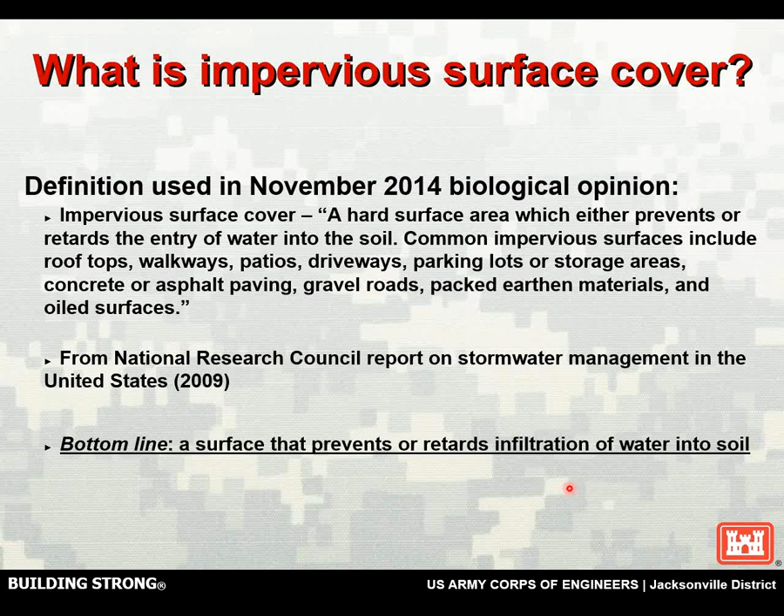Some examples of how we'll see this impervious surface cover: any type of paving, also precast concrete or slabs, abutments that are made of concrete. Some bank stabilization projects, if it's a concrete lined ditch, for instance, or it's riprap that's been grouted, anything that will prevent water from flowing between the rock or pieces of concrete, that would be impervious. And of course, anything with a concrete pad or paving, house pads, driveways, sidewalks, anything like that will be included.

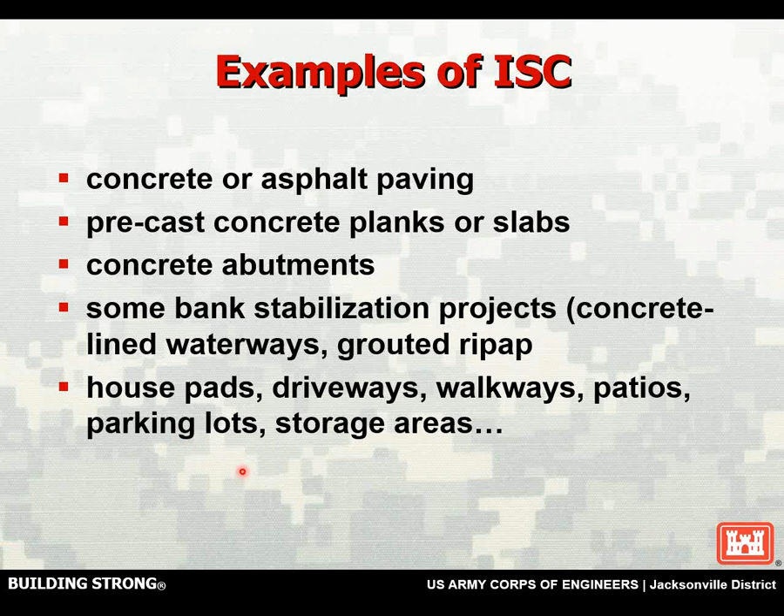So it's just as important to understand what is not impervious surface cover. So anything temporary, even if it is impervious at the time it's there, as long as it's not going to be a permanent structure or fill, we're not going to track that as impervious surface cover. Fill for slopes, that's going to be important to DOT and other linear projects. Lawns, parks, anything that can be filled and still maintain vegetation.

Mechanized land clearing, types of techniques, whether it's porous pavers or mats that are specifically designed to allow water infiltration. Again, water can flow through, it's not going to be impervious. Riprap. If a boat ramp is constructed, for instance, with loose rock or metal grate, again, water is able to move through. Bioengineering techniques, whether it's log vanes or willow planting, obviously that will still allow the water to percolate through, so we would not count that. So the bottom line is it's any project feature specifically designed to allow the infiltration of water.

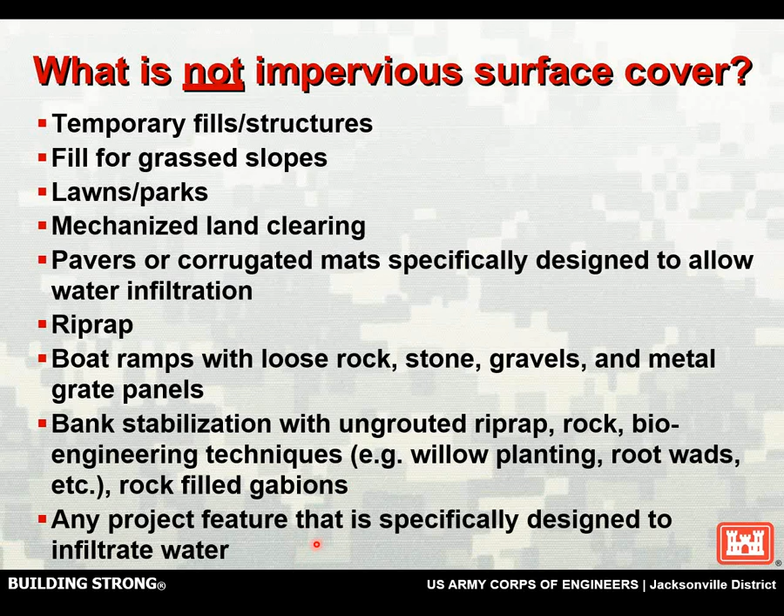But what doesn't it apply to? Well, structures that are just regulated by the Corps under the Rivers and Harbors Act, Section 10 waters, things like piers, piles, buoys, marinas, floating docks are not going to create impervious surface cover. Same with dredging. Important here, fills that are below the mean high water line or the ordinary high water line, whether it's in tidal or non-tidal waters, would not create new impervious surface cover. Same with excavation activities, no new ISC from that. Again, any temporary fills, as long as they're temporary and will be removed, we won't count those.

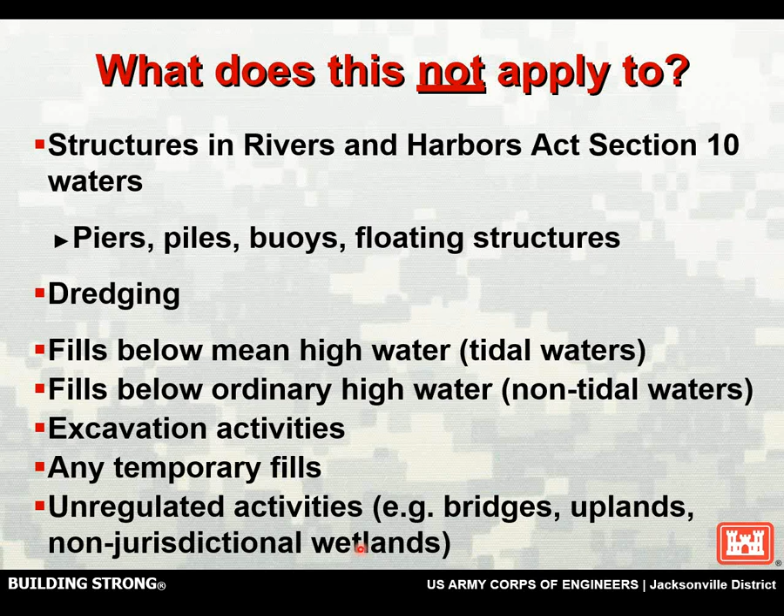Unregulated activities, an important one here in the examples, bridges, for instance, the Corps does not regulate those, that's the Coast Guard, so that would not create any new additional impervious surface cover. Work in uplands or non-jurisdictional wetlands, again, would not be considered ISC that we need to track.

So what we're going to track and enter in the Corps data entry system, ORM, are additions or removal of impervious surface cover that result from regulated activities in waters and wetlands. So it's not going to be all impervious surface cover that may result from a project that we permit. We're only going to track the additions of ISC that are within those listed 10-digit HUCs, basically the ones that NMFS has provided to us as the ones they're concerned with. So it has to be in those locations, it has to be associated with permanent losses, nothing temporary, and it has to be directly a result of our regulated activities.

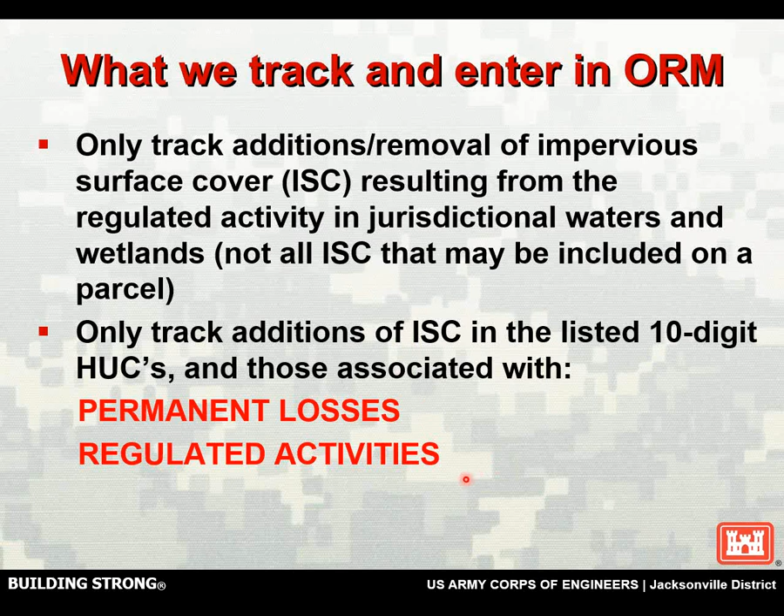So a little example here, if you look at this entire photograph as a Corps authorized project. Massive project. We've got a wetland stream that runs across this part of the photo. We've got some impervious surface cover as a result of the Corps permit. Got a road crossing here with some ISC, same as here and here. So these 3 road crossings all involve impervious surface cover.

You've got a lot of impervious surface cover here for this parking lot, building, parking lot, road, but all that area is in uplands. So even though it is part of this overall project, it's not regulated by us because it's in uplands. We would not track that. We'd only track the impervious surface cover in these 3 wetland crossings here.

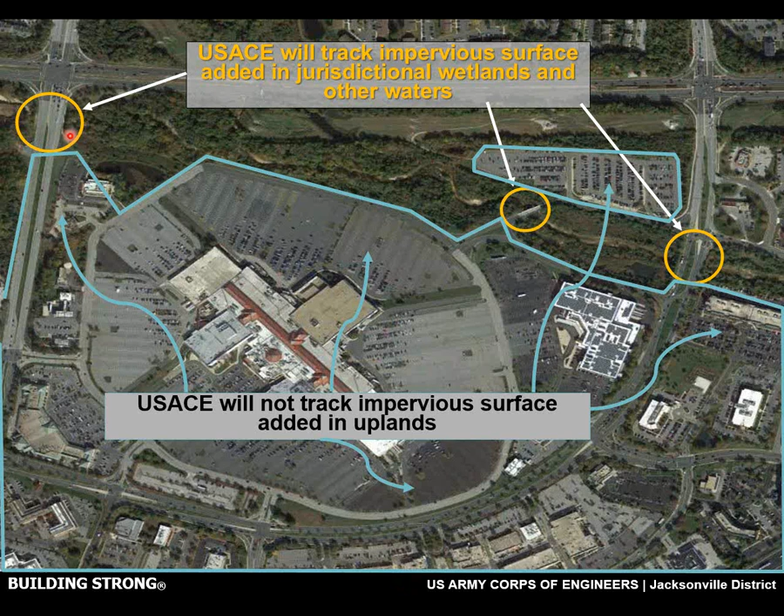So the 1% threshold I mentioned earlier. What NOAA Fisheries did was they looked at the most recent data they had, which was from 2011, the USGS land cover information, and they determined what the baseline acreage of impervious surface cover was in each one of these 10-digit HUCs that they're using. And then they calculated 1% of that baseline acreage. So if it was 100 acres of impervious surface cover within that watershed, that 1% would be 1 acre.

So as the Corps project managers enter additions and removals of impervious surface cover, we'll put it in ORM, and ORM will calculate as we go what the net additions add up to and whether we're getting close to that 1% threshold. And that's where NMFS feels there may be an additional effect to species that they have under their purview.

So as we put it into our data entry system, we'll see if we're getting close within a watershed to this important 1% threshold. We'll see the amounts as we enter them. We'll also see a percent over the baseline if we've already exceeded that baseline. We can see that when we input this data, when we issue permits, and we'll also be running reports so we can see that information as we go.

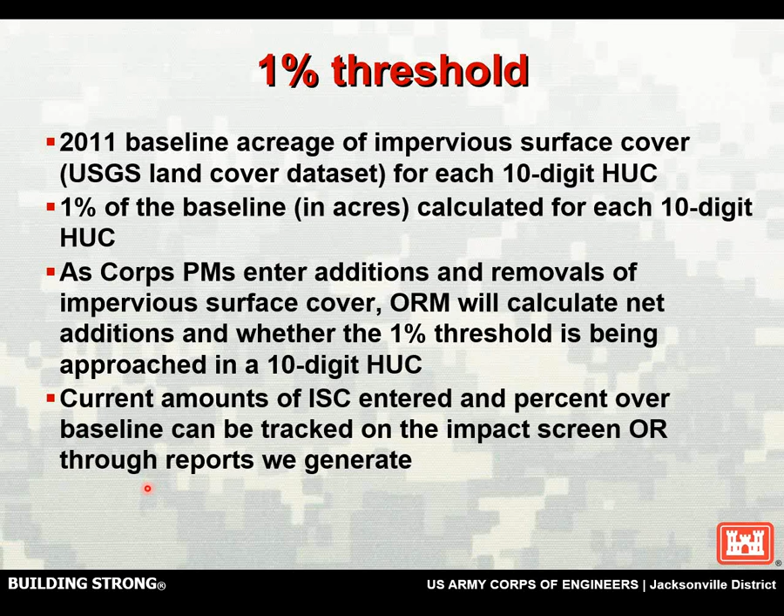What will happen if this 1% threshold is exceeded within a HUC? We're not looking at the state of Florida, we're looking at just this individual HUC. It's indicated on the impact screen as well as those ORM reports. We'll know when we hit that number if we do.

The Corps project manager is going to evaluate their permit application, whether it's a nationwide pre-construction notification, a regional general permit verification request, or an individual permit application. We're going to do that in the normal manner that we do. This is not going to create any new consultations, any new coordination up front with NMFS for projects that we otherwise wouldn't coordinate with them on. We're not going to be coordinating.

What will happen, though, is we'll do our normal evaluation to see whether the proposed activity may affect the listed species or its critical habitat. So what the Corps can do is we'll consider if that 1% threshold has been exceeded, if there's any additional effect. If the 1% threshold has been exceeded in that HUC that this project lies within, we'll determine at that time, will the project affect or may affect listed species or critical habitat. We'll initiate our normal Section 7 consultation like we already would.

The only thing that will be different is we'll have to include this statement here at the bottom, advising NMFS that within this HUC, the permitted impervious surface cover within waters of the U.S. has exceeded 1% over the baseline. So that's really the only difference. Again, no new consultations. We won't be consulting in areas we wouldn't have originally. This is just one extra step if we exceed that threshold in that location.

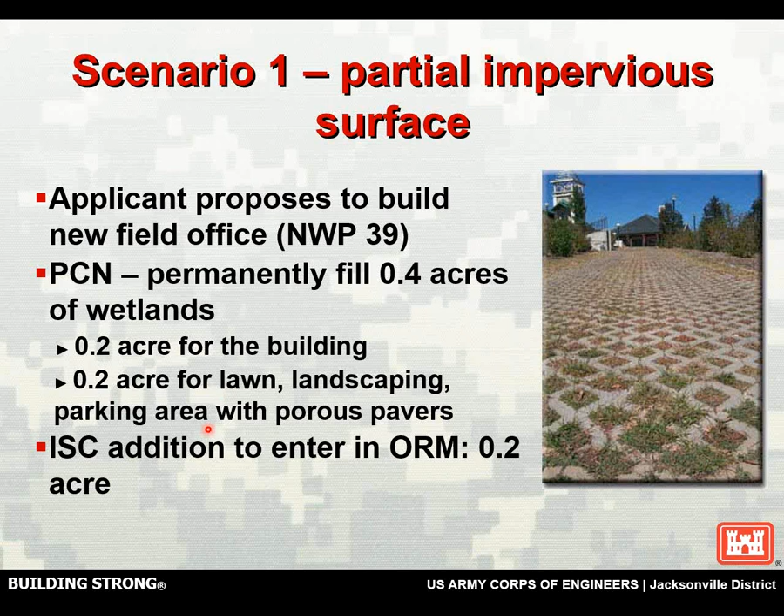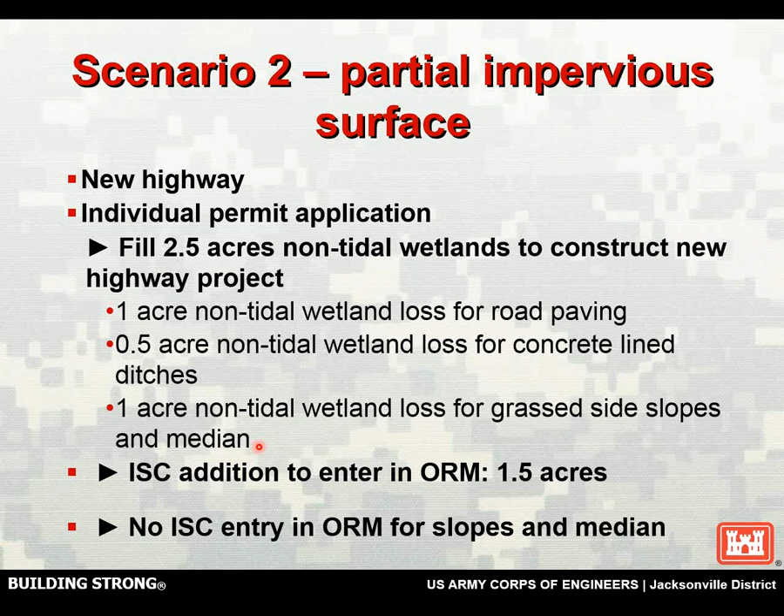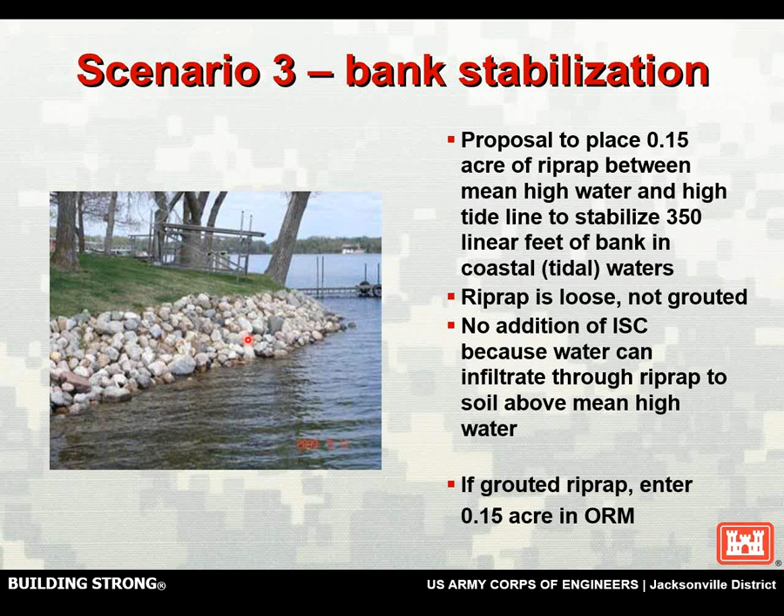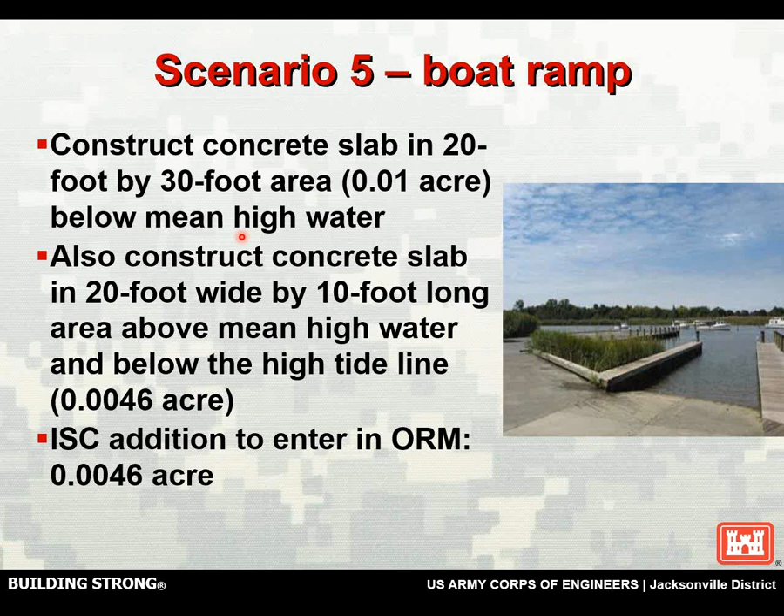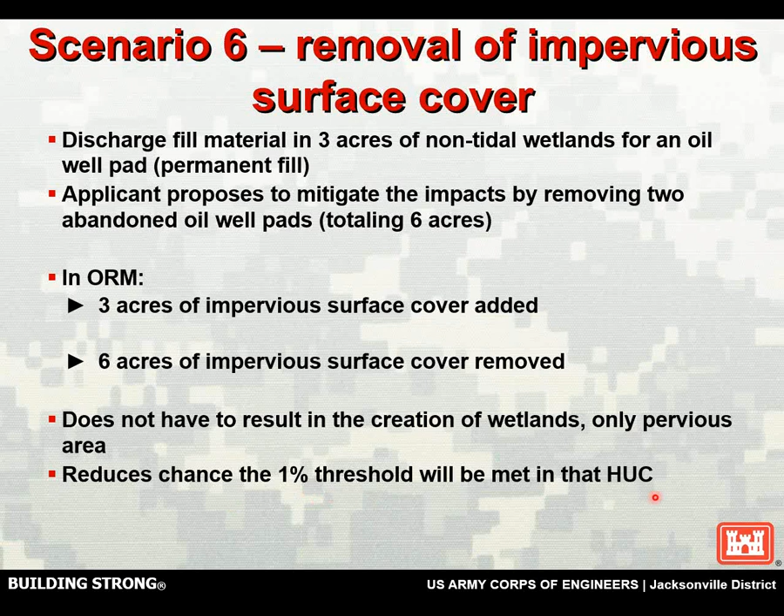So that's the quick summary there. And if anyone has any questions.

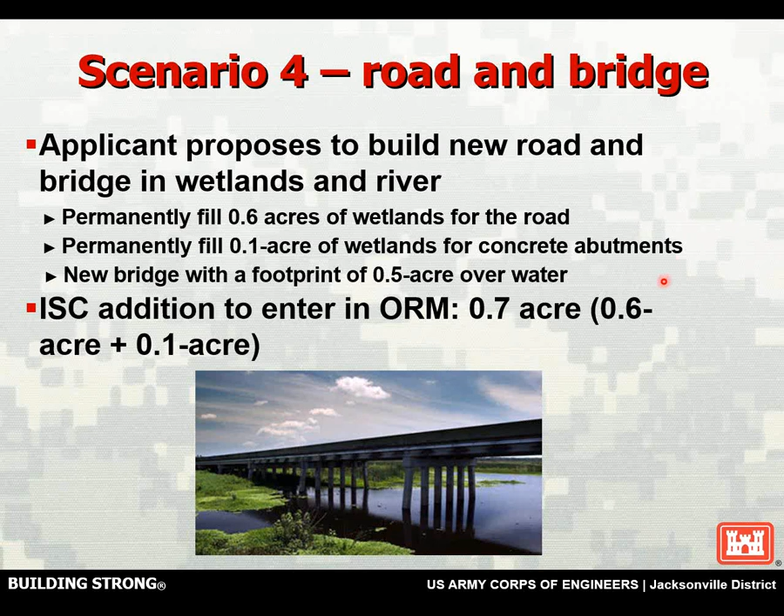We have one more question following up on that 1% from Ginger Creighton in our District 7 office. Is there a current amount per basin available so we know which basins are nearing that 1% threshold? Yes. In the PDF we have right now, it shows all the HUCs within the areas that each of our offices work, and I can send that too, and hopefully we'll have a KMZ version of that. But is that just a location of those? Will it show that it's nearing the 1%?

We actually have two versions of it. We have a version that just shows the 10-digit HUC listed in each watershed and just that label, and then we have one that shows what the 1% is. Okay. It doesn't show a running total on it. It just shows what that 1% threshold is.

So some of the more highly developed watersheds, maybe in a more urban area, that number's up in the hundreds of acres. But if you've got a rural watershed, it may be 10 acres, just because there's so little impervious surface cover there now, just really a few roads and whatever. So in those areas, a large project could feasibly hit that 1% threshold with just one project.

But I'll send you out that map that shows what those numbers are, so you can key in on which ones, as a result of maybe one project you're working on, might even come close to exceeding that 1%. Okay, that sounds good, and I can share that out with everyone.